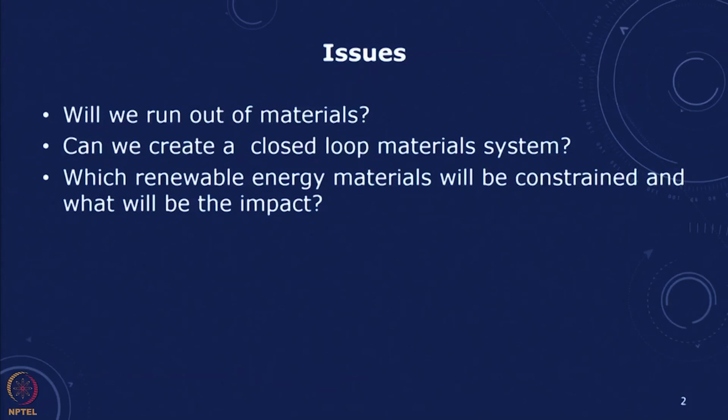materials? So the issues that we would like to address: one is, will we run out of materials? Can we create a closed loop materials system? Which renewable energy materials will be constrained and what will be the impact? We are not going to completely answer all these questions, but we will look at the way in which we can analyze this and what are the typical types of materials and how they are looking at it.

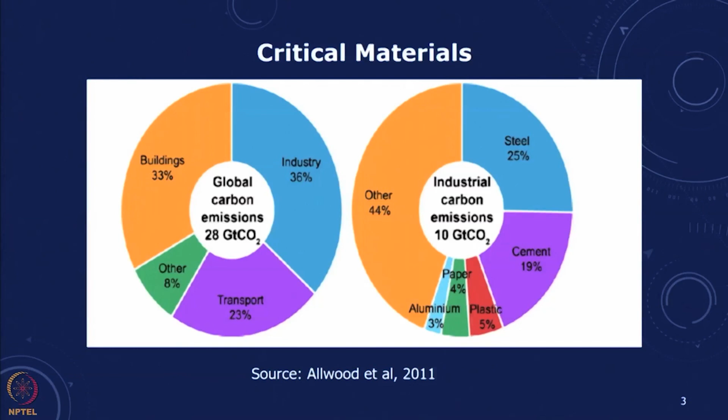So if we look at the materials, we find that a significant amount of our CO2 emissions are accounted for by some of the most energy intensive and carbon intensive materials. If you look at materials, we are looking at steel, cement, aluminum, paper, plastics, and these account for the largest chunk of the carbon emissions. It's about 10 gigatons of CO2 out of the total of 28 gigatons of CO2 in a particular year, I think it's 2008. And this is from the paper by Allwood. You can look at this paper for more details.

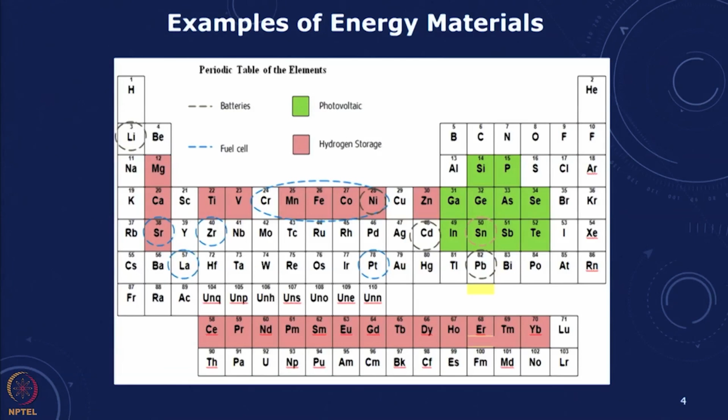Then you have lithium. Then you have these materials which are used for hydrogen storage, and many of these materials are located in some regions and in a few countries, and they also involve a significant amount of energy use in their extraction. So when we look at materials, we can think in terms of material efficiency, and this is from the paper by Allwood. We can try and design so that we use less materials. This is called dematerialization.

Look at your cell phone or look at a motor, see how much steel and how much metal is going into it, see if you can have the same functionality using less metal. We can also substitute energy intensive materials by less energy intensive materials, materials that have less carbon intensity. So we can do dematerialization, we can do light weighting, and now with nanotechnology we have the advantage that we can actually have designer materials which have the properties that we require.

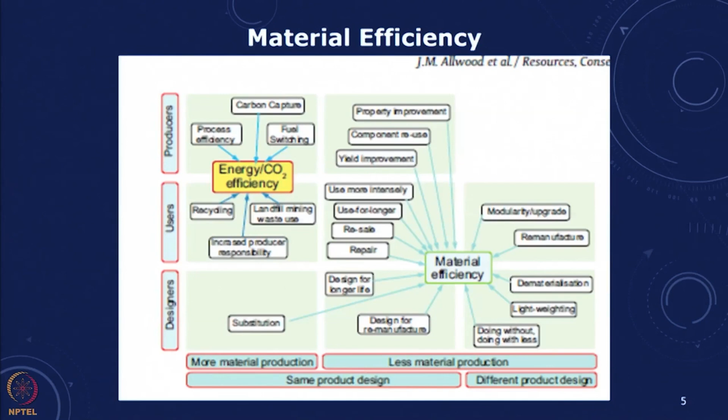For instance, it's been said that if you look at the Eiffel Tower and you look at the weight of that Eiffel Tower, today if you have designer steel with nano composites and engineered steel, we could reduce the quantity of steel that is required with the same strength, and we can get a much more lightweight Eiffel Tower using less materials.

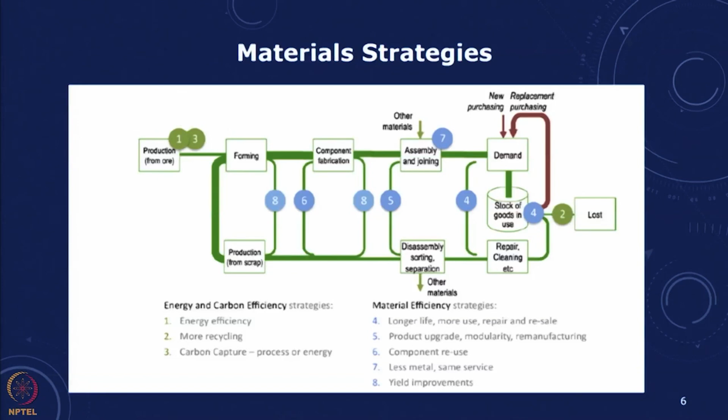In general, when we look at the production of a material, at each stage of the production there would be some scrap. We can recycle that scrap. Then when we look at the demand, and after the post demand, when it is used, some part of it can be recycled. So we can try to see if we can have this entire thing as a loop which is closed, and we use relatively less amounts of virgin material, and we can try and recycle at each of these stages.

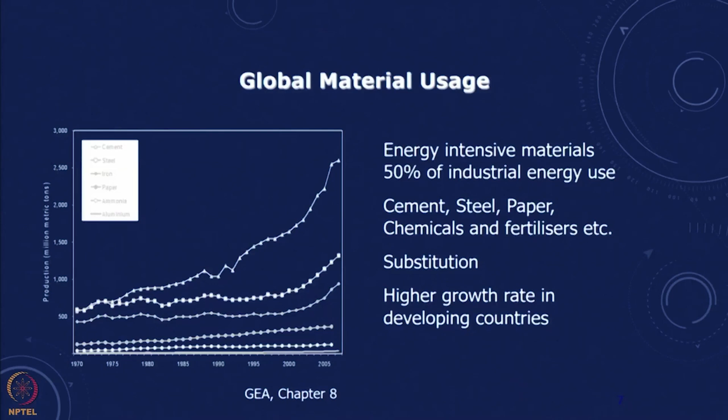If we look at the global material use, you will see that energy intensive materials account for about 50% of the industrial energy use: cement, steel, paper, chemicals, fertilizers. And the interesting thing is that most of these materials are now being consumed by the developing countries. There are much higher growth rates in the developing countries. If we look at any of these materials, we can plot.

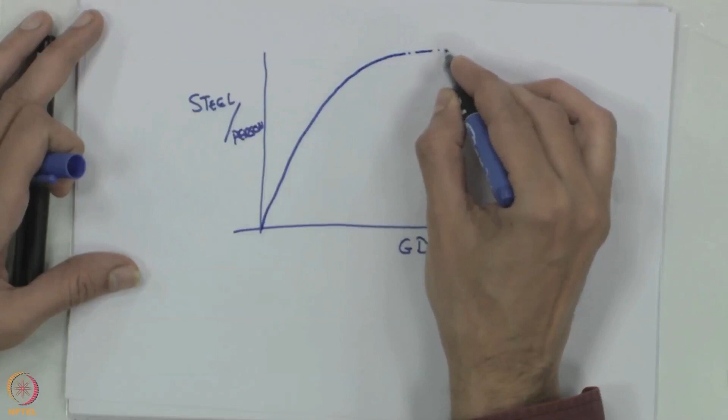If you look at, let's say, steel use per person, and we look at the status of the country in terms of GDP per capita or GDP per person, you find that this increases with income to a point where it stabilizes and then maybe declines. This is something like what is called the Kuznets curve.

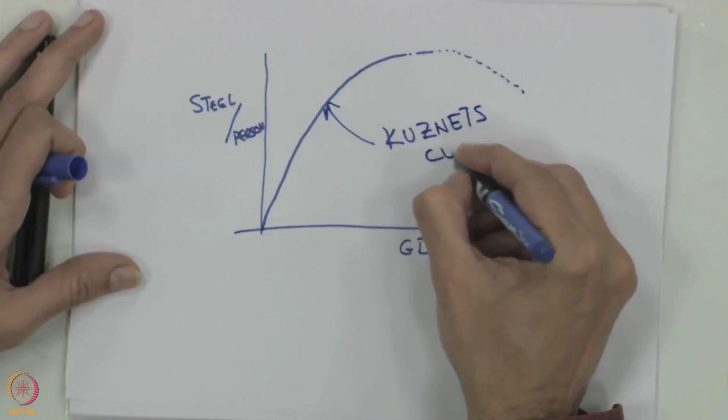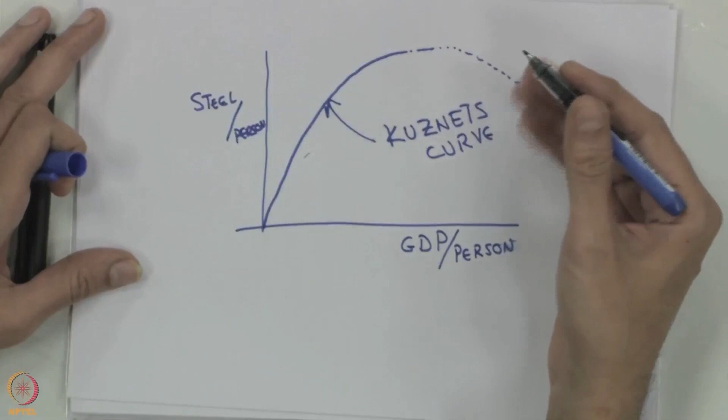So most of the developing countries are at this stage where there is this growth. Developed countries have already gone past it, where you have already produced all the steel, your infrastructure is already created, you have the number of cars and the kind of things which are there, and then the number starts declining. And so that's the kind of thing, and I'll just show you some of these

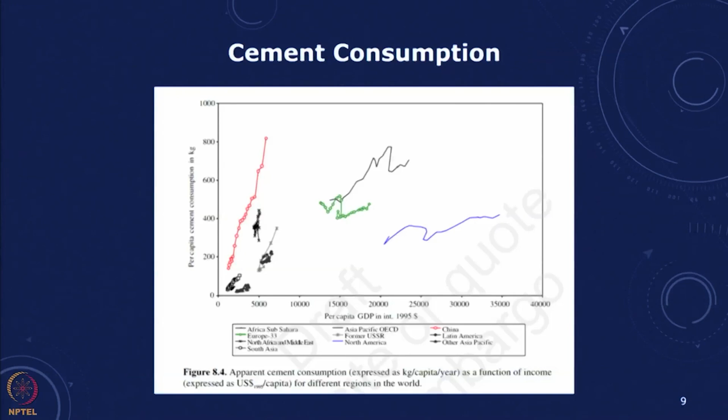This similar thing you can see, for instance, for cement. You can look at the different levels at which you have these developing countries which are growing. In these cases, it's more or less saturating. Of course, it's saturating at different kinds of levels. And this is sort of global demand normalized. You can see that there is an overall growth.

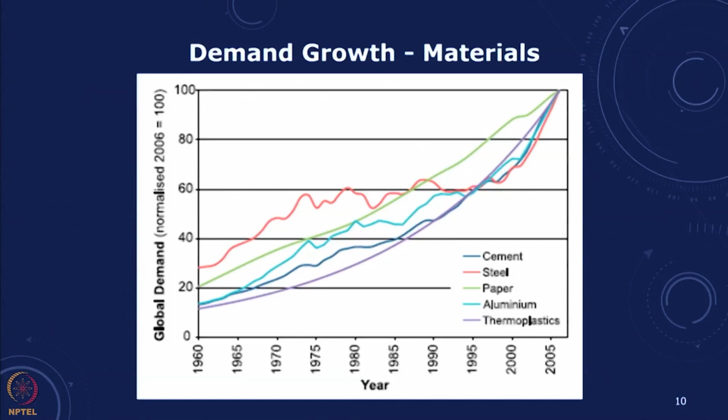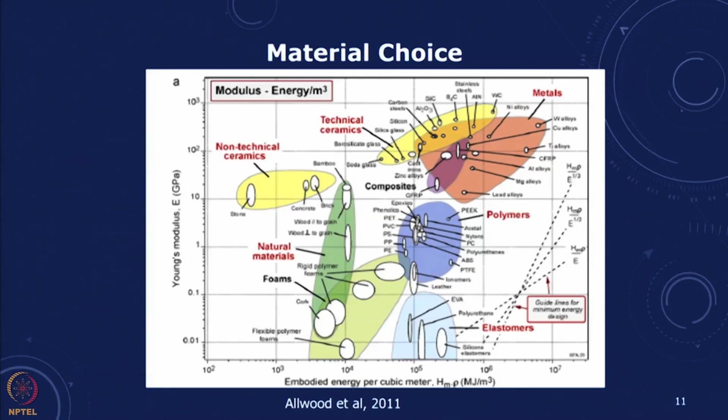Ashby, a scientist in the UK, has created these kinds of design plots, and these design plots are extremely interesting when you look at a particular characteristic. For instance, you look at the Young's modulus, energy per meter cubed, if that is the requirement for a particular application, and we are choosing between metals, polymers, ceramics, and you have the embodied energy, which is the total energy required to create that material, to extract it and to make it available from nature, per cubic meter.

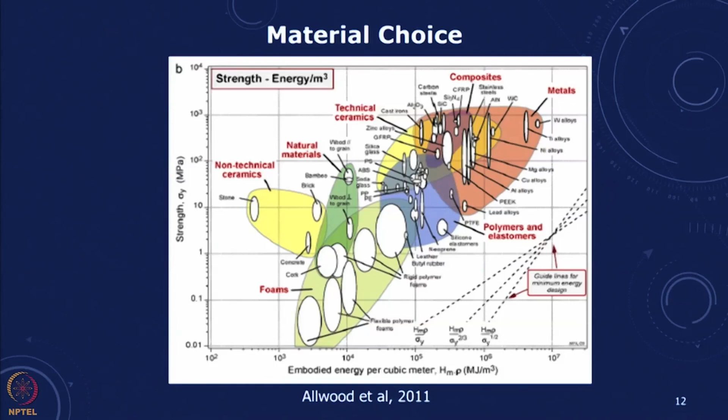So based on this, we can decide between different materials and see what is the implication when we are making a particular choice in terms of the amount of energy that is being used. We can have similar kinds of plots giving the carbon intensity of these. This is another plot which is talking about the strength and the embodied energy. So these are interesting design aids which can be used to choose less energy intensive materials and less carbon intensive materials for a particular application.

When we talk about embodied energy and we do the life cycle, we will look at this a little more in detail. But one can look at different types of elements and see what kind of energy is embodied and what kind of efficiency is there. So, in general, as the demand increases, in most of the materials we are looking at a finite stock. There are stocks, but there are possibilities of substitutes, and with technology improvement it is possible that we can have less use of the material, but in general what one expects is that we will run out of materials.

And so, there was this debate, and there is a very interesting bet in the literature. In Science there is a journal article published by Professor Julian Simon in 1980, and he basically felt that the planet's resources are not finite. Ecologists and environmentalists were saying that we need to look at materials running out, we need to look at the resources, and he said that the planet's resources are actually not finite.

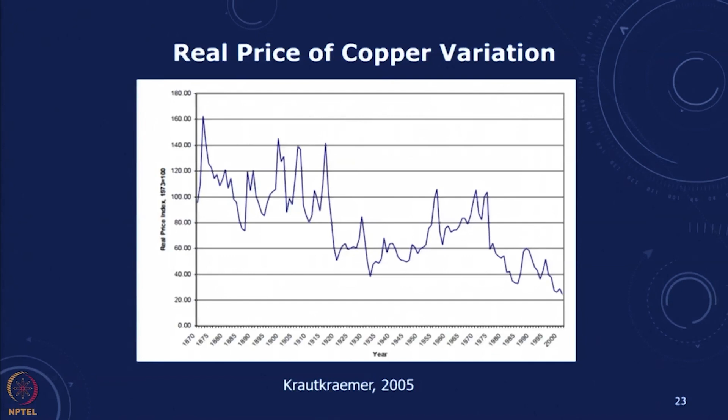And so it is not clear. There is an issue of scarcity, but there is also innovation and the possibility of technological improvements. So when we talk in terms of materials, we have to be aware of scarcities in the short term, but it is not completely apparent that this will necessarily result in extremely high prices. There could be backstop technologies and other options which are available. So for all of these materials, we can use the same static R/P ratio, or we can use something like the Hubbert curve if you want to estimate time periods.

These are all these price trends. In many of the cases, we can actually look at what is the distribution of these materials. Sometimes regionally, for instance, if you look at lithium, it's only available in a few countries of the world. So the control of these materials could involve getting an advantage, and then the industry and the development may be affected by it. So we may need to look at substitutes.

So with this, we've got a quick introduction to the kind of materials that are used for the energy sector. We looked at how, with development, material use per capita will increase and then saturate and maybe then decline. And then there could be possibilities in terms of substitution by more energy efficient and low carbon materials. It's not essential that scarcity of materials always results in an increase of price. Historical trends show that there is also a scope for innovation and technology improvements where prices may actually decline with time. With this, we end the portion on materials.